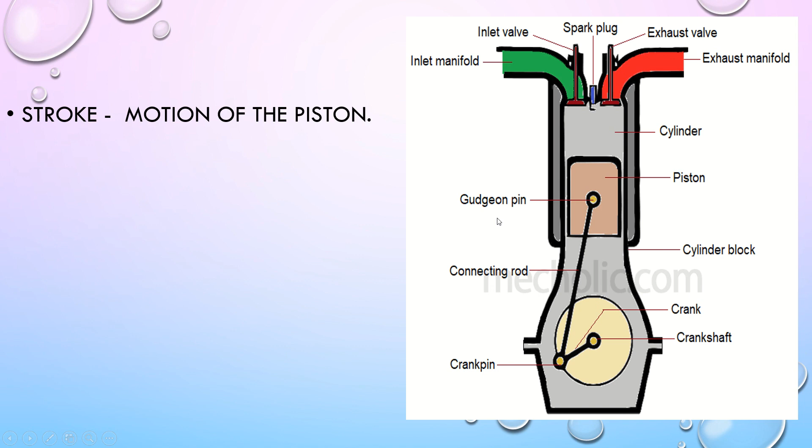Moving further, there are four processes occurring when the engine starts: suction, compression, combustion, and exhaustion. Now, step by step, with the help of the four-stroke engine, we will understand all the above processes.

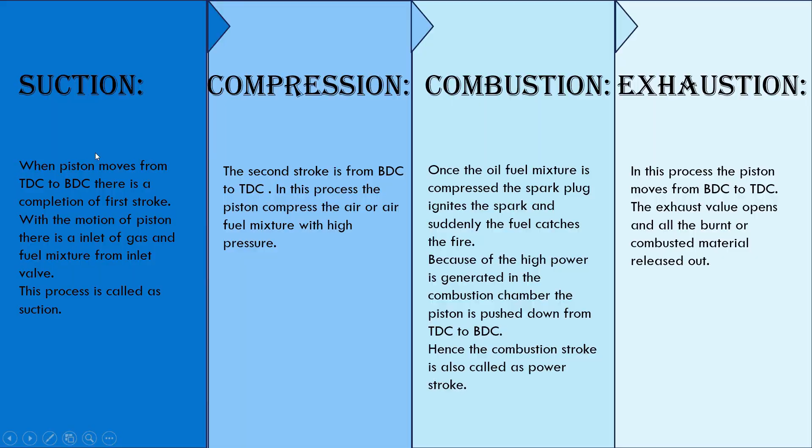First, let's see the suction process. This is the first stroke. In this, the fuel enters the cylinder from the inlet valve. The piston moves from TDC to BDC.

The second stroke is the compression stroke. Once the fuel enters the cylinder, the suction process completes. This second stroke goes from BDC to TDC, and in this process, the piston compresses the air fuel mixture. The compression is high, so there is no requirement of a spark plug in a four-stroke engine. Instead, there is a fuel injector which sprinkles the fuel on hot compressed air, and the air immediately catches fire. This completes the process of compression.

The third stroke is the combustion stroke, also called the power stroke. Once the air fuel mixture is compressed, the spark plug ignites the spark and the fuel suddenly catches fire. Because of the high power generated in the combustion chamber, the piston is pushed down from TDC to BDC. Hence, the combustion stroke is also called the power stroke.

The fourth and last stroke is the exhaust stroke or exhaustion process. In this process, the piston moves from BDC to TDC. The exhaust valve opens and all the burnt or combusted material is released out. This is the detailed process of working of a four-stroke engine.

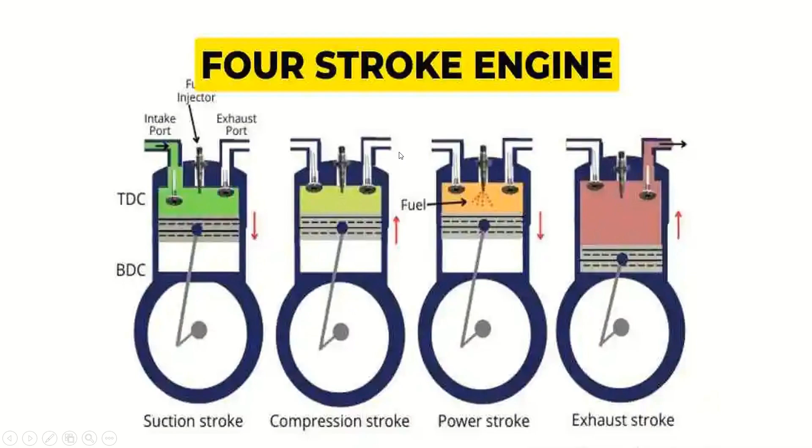Now let us understand the working principle of the two-stroke engine. The name two-stroke indicates there will be two movements of the piston. All four processes—suction, compression, combustion, and exhaustion—will complete in two strokes. In the first stroke, there is suction and compression, and in the other stroke, there is combustion.

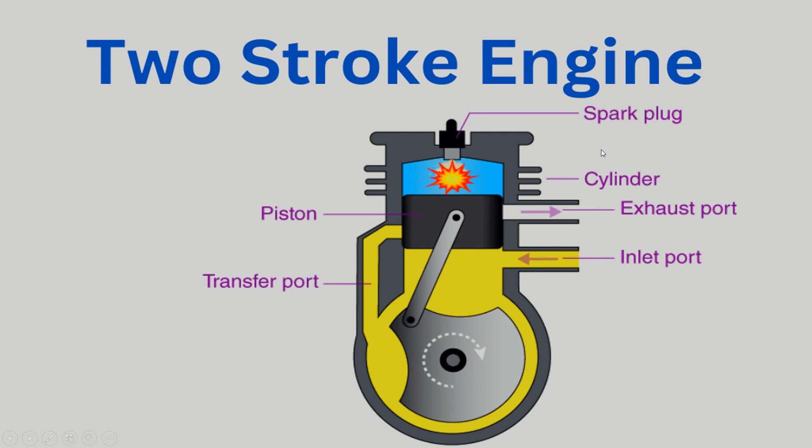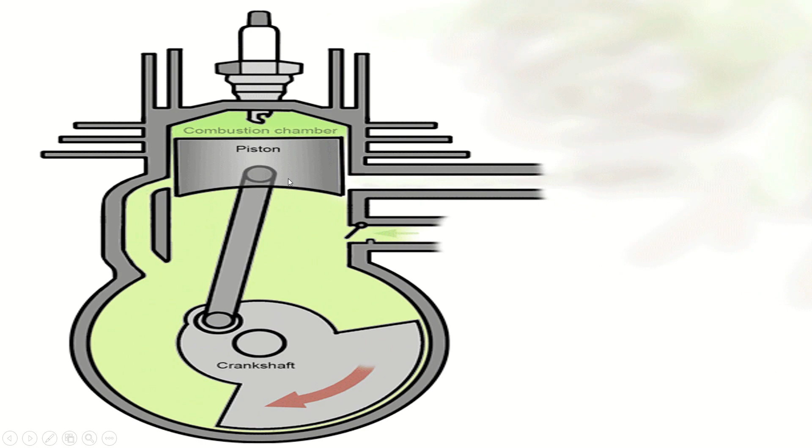The two-stroke engine is mostly similar to the four-stroke engine. In the first stroke, the piston moves from TDC to BDC, as we can see in this animation video. With this, there is an intake of air fuel mixture from the transfer port. At TDC, there is compression.

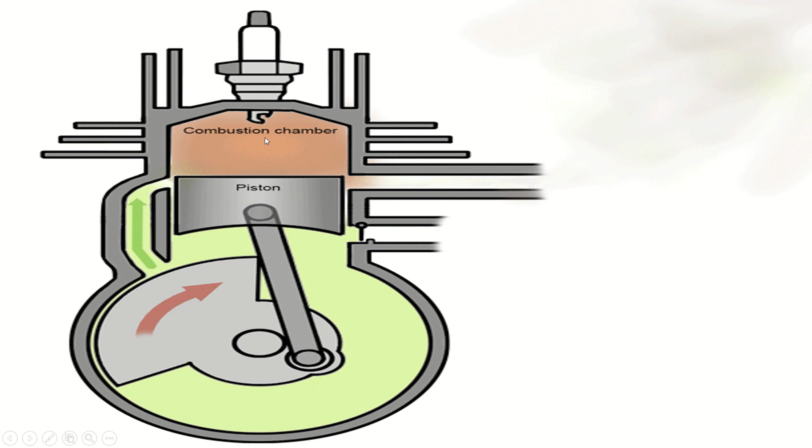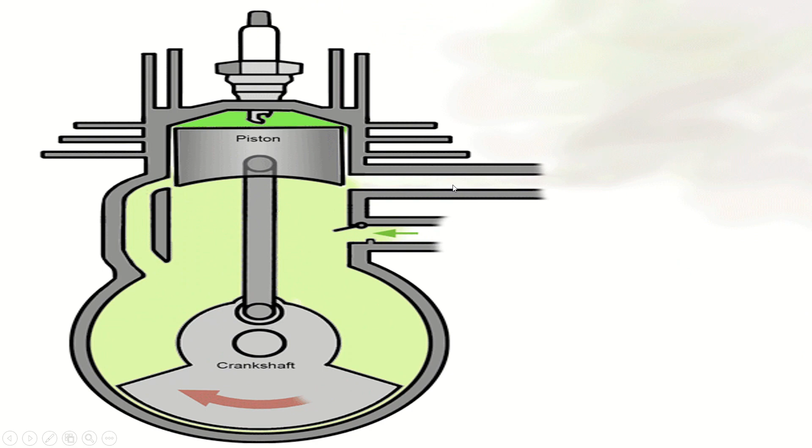When the piston compresses the air fuel mixture, the spark plug attached at the top of the cylinder ignites the spark, and the air fuel mixture burns, creating the power stroke. The second stroke is due to this power stroke, which pushes the piston down from TDC to BDC. With this, the combustion and exhaustion process takes place.

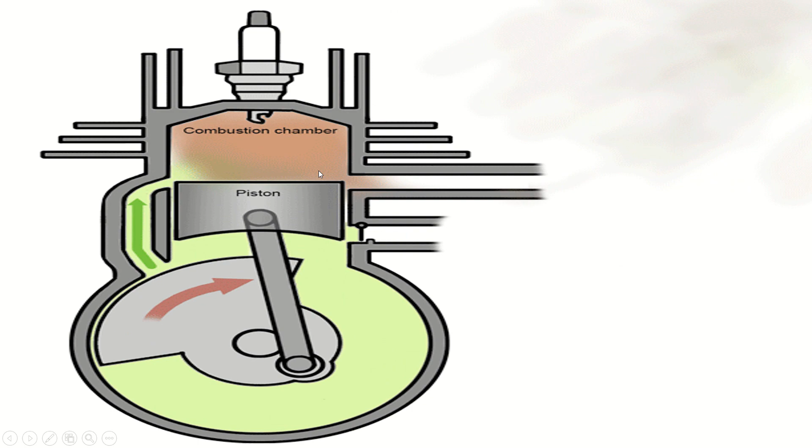As we can see in this video, when the burnt material is released out, there is immediately a flow of air fuel mixture from the transfer port. In this way, the two-stroke engine works.

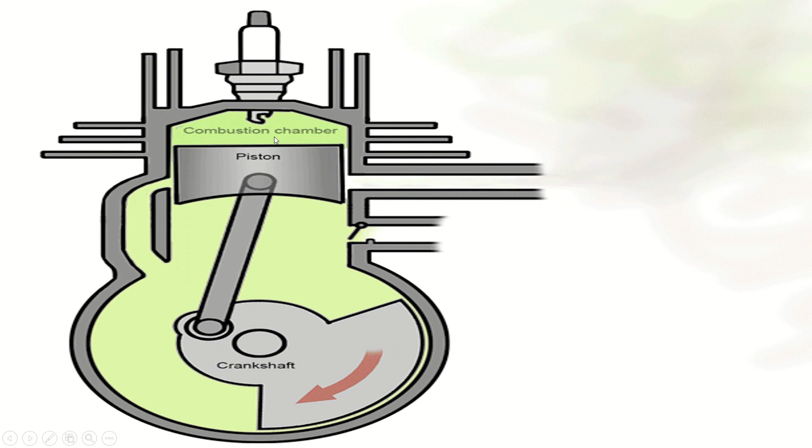Talking about power stroke, in a four-stroke engine there is a power stroke for every two revolutions, while in a two-stroke engine there is a power stroke for every one revolution.

Admission of charge is nothing but the entering of fuel into the cylinder. In a four-stroke engine, the fuel directly enters the cylinder, while in a two-stroke engine, the fuel first enters the crankcase and is then transferred to the cylinder.

Talking about the valves, the four-stroke engine consists of inlet and exhaust valves operated by a cam mechanism, while the two-stroke engine consists of ports which open and close with piston movement.

Talking about cooling and lubrication, the four-stroke engine requires lesser cooling and lubrication, while the two-stroke engine requires greater cooling and lubrication.